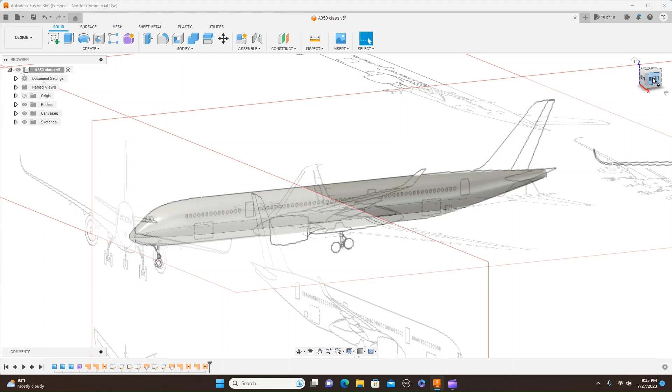So let's see here. What I'm going to do is go ahead and turn the canvases back off, button over here. Now, as you can see, we have fuselage. What I want to do now is take a look at the bodies here, and there's three bodies here. What I'm going to do is combine all these three bodies. So you have this nose, the mid body, and the back here. So what I'm going to do now is go to Modify and select Combine.

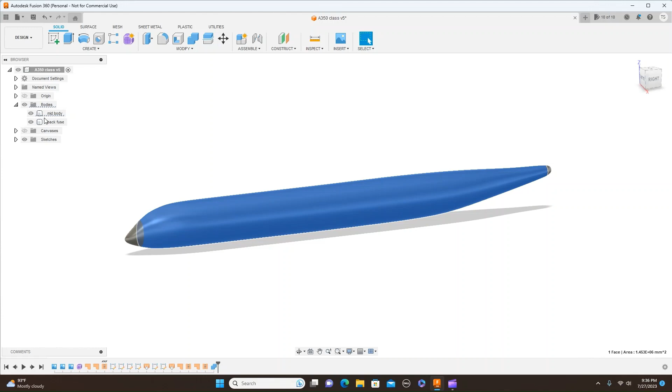And now I'm going to select this as target body, the body here. Then the tool body, this stupid thing. Anyway, select the tool body here and set this to join and click OK. Now you can see over here, we no longer have the nose. Now it's all with the mid body here. So we turn this mid body off. See, the mid body and the nose turns off.

And we're going to do that with the back piece here too. So once again, going to Modify, Combine, click this as target body, and the tool body is this, and hit OK. Now we only have one body here, as you can see, turning on and off.

And some of you are probably wondering why there are no lines in here. To turn the lines off like this, you type in Control-4, it turns them off, and then Control-6 turns them back on. Another little trick there.

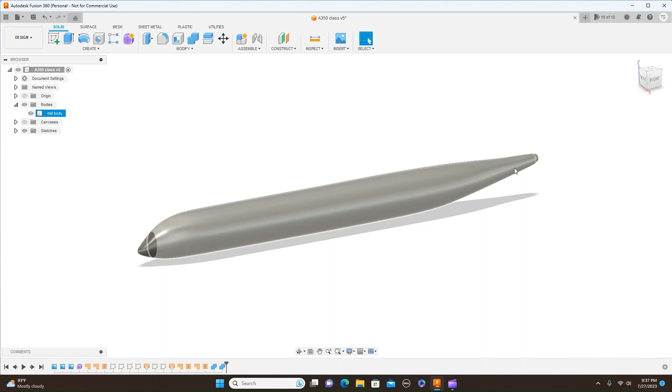But anyway, what I want to do now is make this hollow. So I'm going to come up to Modify, Shell, and I'm going to select the faces I want to shell. I want to shell this, this, and this. So there's three faces, or excuse me, three bodies I want to shell. Now, I want the wall thickness here to be 1 millimeter. So I'll just type in 1 millimeter here and hit OK.

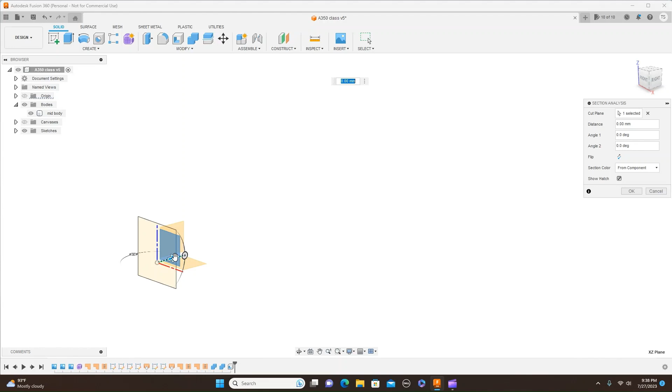Now, you can't really tell that this is shelled inside or not. So what I'm going to do is go to Inspect up here. And now we're going to go to Section Analysis. Now, I want to select this plane here and move this back. As I turn this around, you can see that's hollow inside. Go ahead and cancel that. We don't need it anymore. Now we know that it's hollow inside.

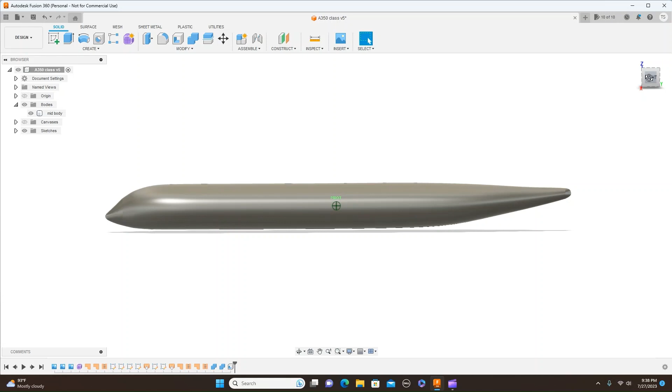Now, unless you have an extremely large printer, you're not going to be able to print this whole thing out. So what you want to do is split this up in pieces. Even if you did have a large printer, with the thin wall, like we have 1 millimeter, this would be very weak here in the middle section. But anyway, I'm going to show you how to strengthen up each section too as we go along.

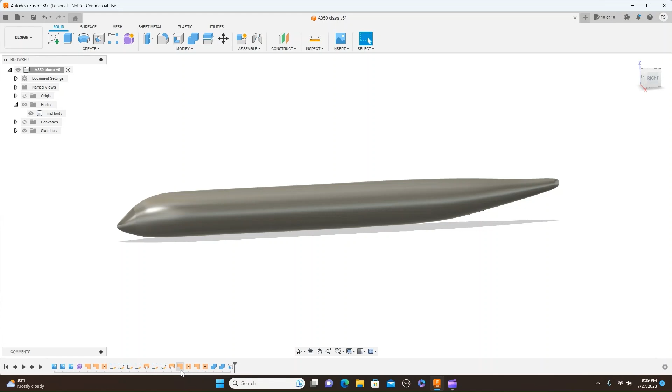So first here, I'm going to do a construction plane, and we want to do an offset plane. Now the plane I want to offset is this front plane here. Now move it back to, if your printer can only print on the z-axis 200 millimeters or 300 millimeters, go ahead and use that.

Or set this to that distance of 250 or 200 or 300, whatever your printer's height will print. But I'll just go ahead and set this for 250 here. And then I'll hit OK. Now I have a plane right there. It's a construction plane right here.

So now what I want to do is split this nose from the rest of this body here. So I'm going to go up here and select Split Body. And this is the body I want to split. See right here, it says body, to select this body. And now the splitting tool that I want to use is this plane here that I just created. And hit OK.

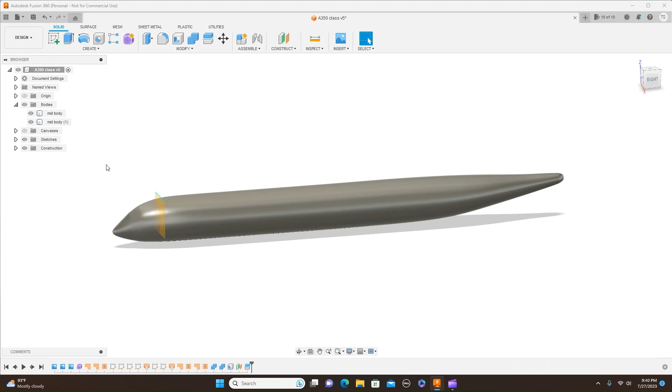Oops. All right. As you see, it split that. And we have two bodies here. So I want to turn this construction plane back off too, because we don't need it right now. But now we have this separated from this. Now this here, I'm going to go ahead and change the name of it to nose, or fuse one, or just nose. Nose would be better.

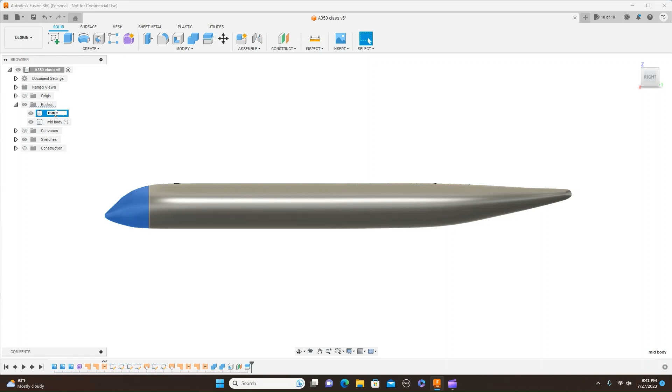All right. Now we have this here. I'm going to turn this off in the back here. And look at this. Now, since this is 1 millimeter all the way around here, this is not very strong here, the structure. So what I've seen other people do, they'll put a ring around here to give this structure strength. And so that's what I'll show you how to do, is put a ring around there to give it strength.

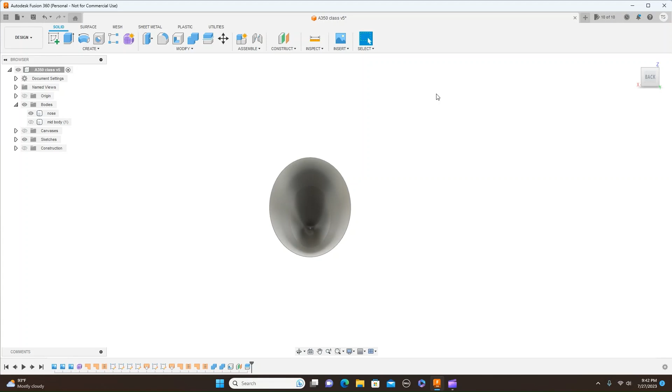Okay. Want to turn this construction plane back on, and we want to create a sketch on this construction plane. Also, now what we want to do is select P to project this ring here, or the picture of that back ring, onto this construction plane right here. And make sure you have this set to specified entities and click OK.

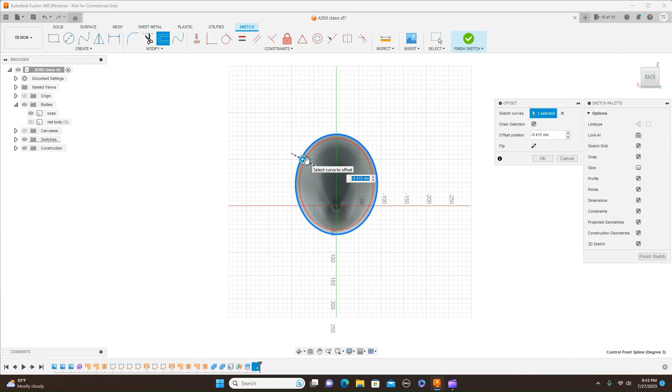Now what we can do is do an offset here. Now you can click this offset here, click here, and we want this to go in to, let's say, -10 millimeters. Enter. Okay. Go ahead and finish sketch.

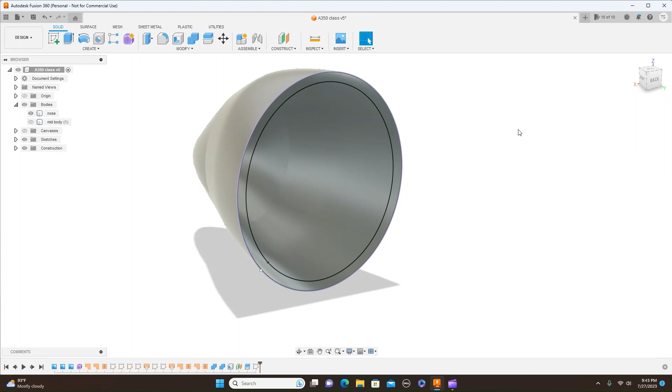All right. Now what we want to do is extrude this ring right here. So we'll hit the letter E for extrude, and we want to select this. Now over here, new body, we don't want a new body. What we want to do is just join the two. So depending how thick you want this to be, I'm going to put it at 3 millimeters. So -3 millimeters. And click OK. Now we have this ring back here. Now having that ring like that will give this structure a lot of strength.

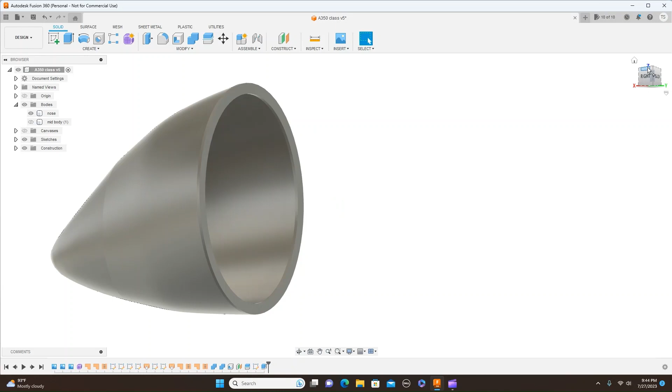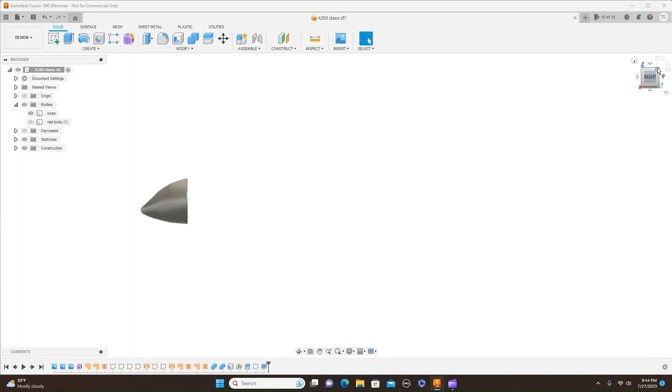Okay, now we can turn the other body back on and have a look. And that's what we have so far. So we have this nose and this rest of the fuselage. Now, here's another little bonus clip that I'll do here. Also, I'll turn this back off. And let's say you want to have retractable landing gear in your model, and you want to have a plate in here for that retractable landing gear.

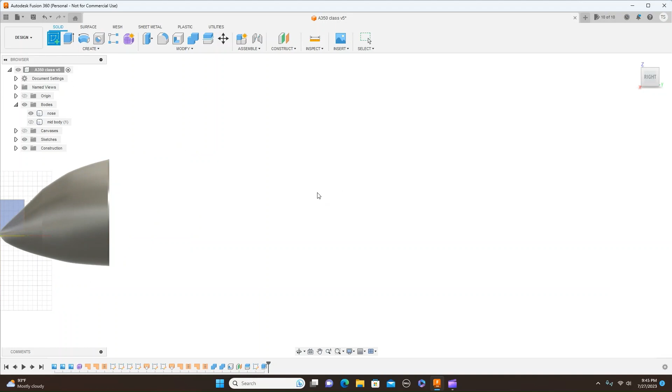What you want to do now is create a sketch. Now, this plane right here may be high enough, but if it were not high enough or low enough for your gear, what you want to do is just come up here and do an offset plane. Then it's going to ask you which plane you want to offset, and you want to offset, say, this plane right here. And let's say it's not high enough, you just move another plane up here to where you want it to be, and then you click OK.

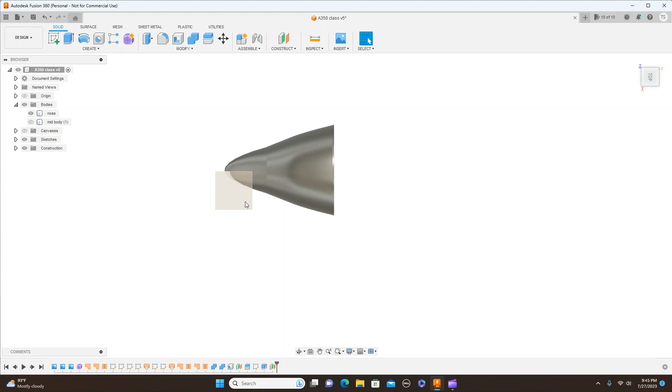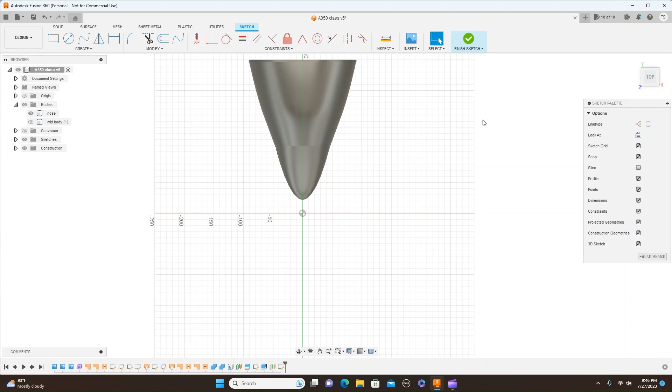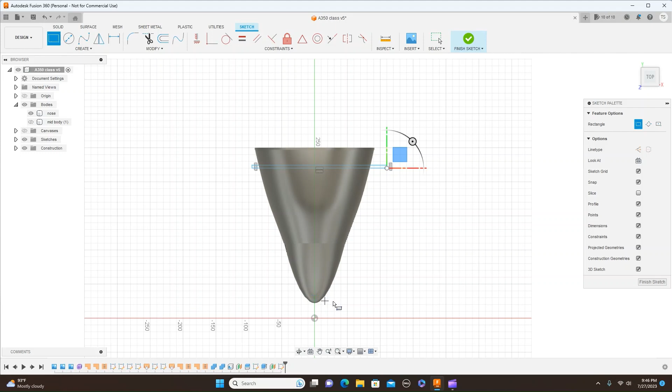Now, what you want to do is go ahead and draw on this plane right here. So what I'm going to do is go ahead and click create sketch again, and it's going to be on this plane here. And now I'm just going to draw a box. Here, here. Now, you can move it all the way up to the nose if you want to, but I'm not going to put it all up to the nose.

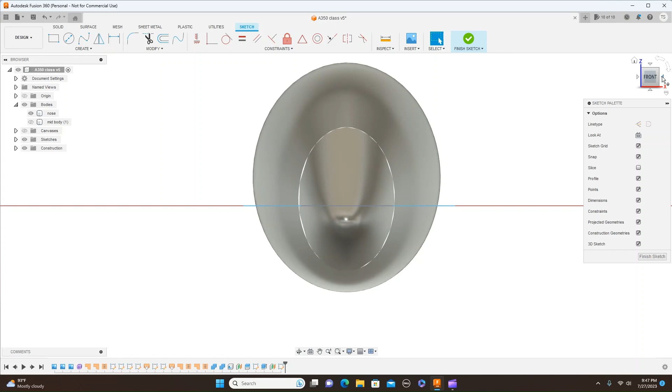Let me escape here for a second. I didn't mean to do that, so we're going to just click back, get rid of that, and click here, here, here, here, and here. Click OK. Now, we have this box drawn on that plane right in here. And you can see that.

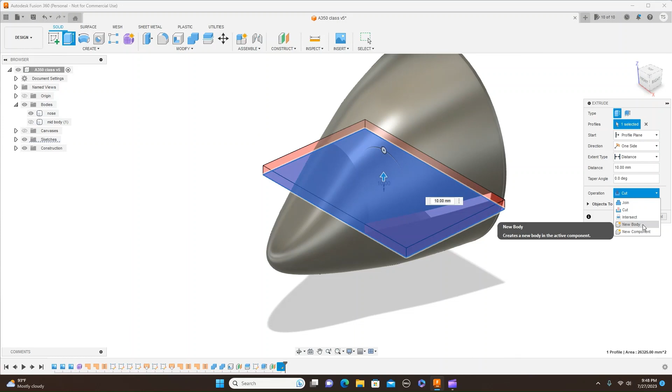Now what we want to do is extrude this box. So we'll hit the letter E for extrude and select this. And depending on what thickness you want this to be, I'll just say 3 millimeters. Move that up, but you don't want this set to cut. You want this set to new body. And click OK. Now you have that inside of there.

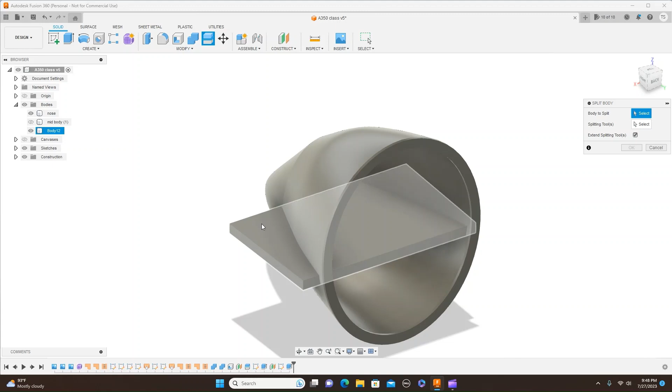So what we want to do now is get rid of the outside of this, so we'll just have this and then the internal. So what we do here, we're going to do a split body. You come to modify here and go to split body. This is the body to split here, what we just did. Then the splitting tool, select splitting tool over here, and it's going to be this. And we hit OK.

Now, what we can do is here, body 13, which is that one here, right click, and just click remove. And this here, body 14, same thing, right click and remove.

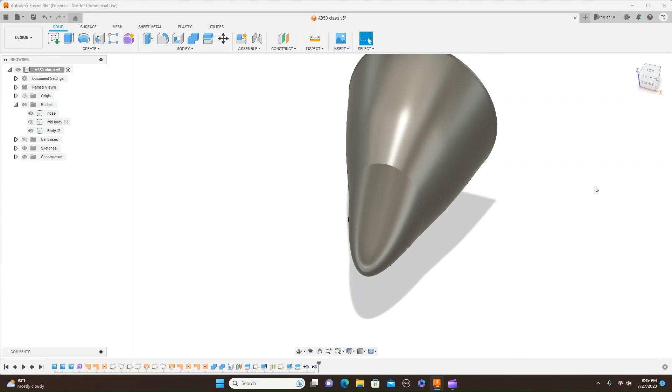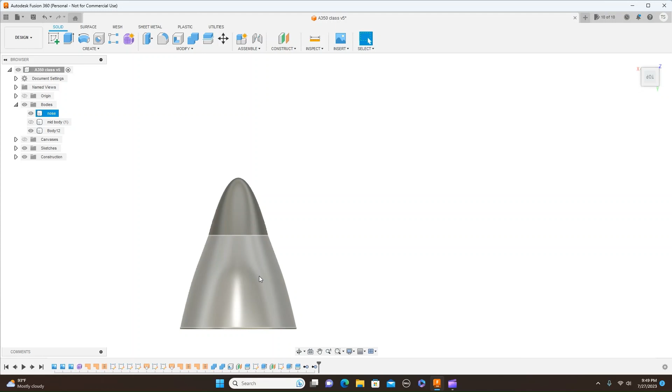And as you can see, this is inside here now. What we can do now is turn the nose off here, and this is still remaining. So measure your landing gear, and if you want to draw an opening so your landing gear will fit right down in here, you just hit create sketch, and you want to draw a sketch on this plane here.

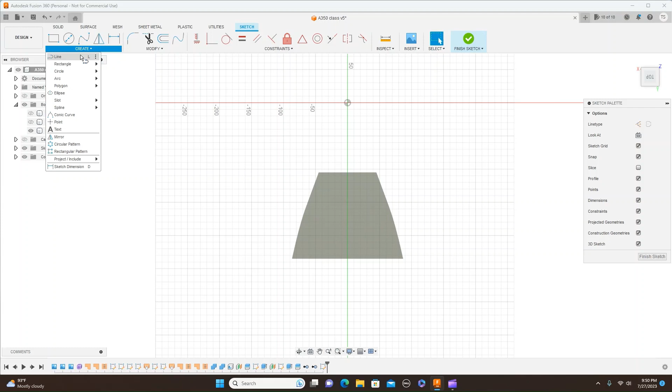And don't select this plane. You want to draw it right on top of here. So back to the top. Click here. And you can use the shortcut key L for line, or you can come over here and click line. And after you measured how big your landing gear is, I'm just guesstimating what size it would be, just to show you how to do this.

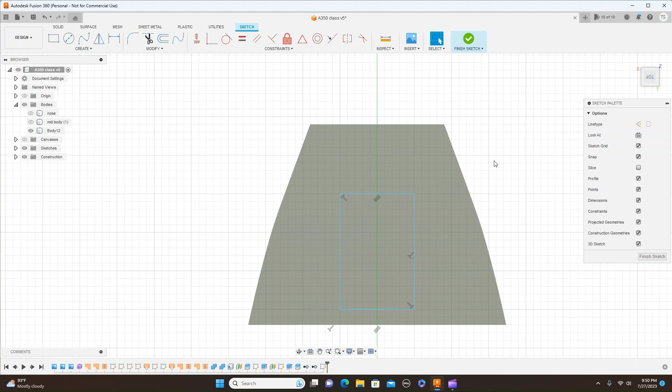Now here we want to extrude this. Hit the letter E for extrude, and we want to set this to actually cut. And take this and move this down and click OK. Now you have this. If you turn the nose back on, then you have that inside of there.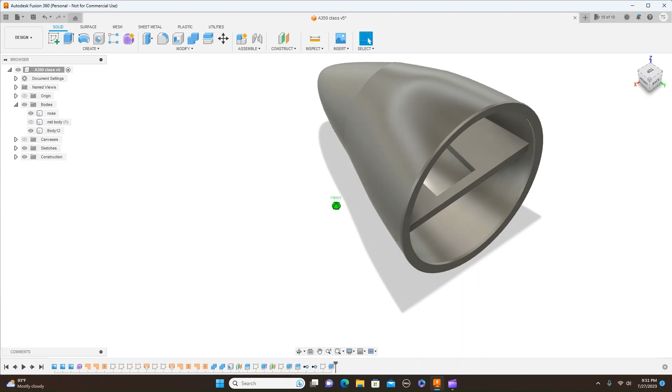Now you may even want to go farther and put the holes here for the mount. And to do that, again, create sketch. You want to draw here. And select center diameter circle. And let's say if you want it here. And let's just say 5 millimeters. Okay.

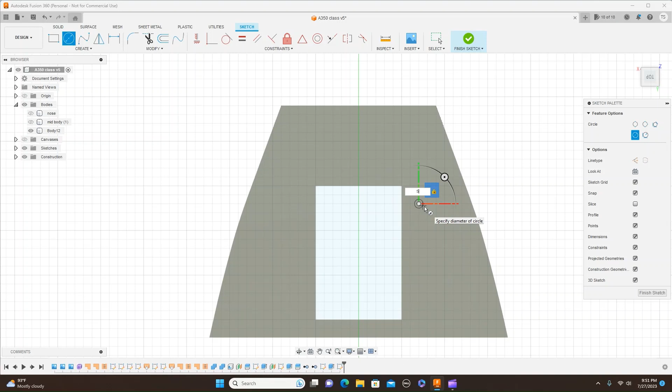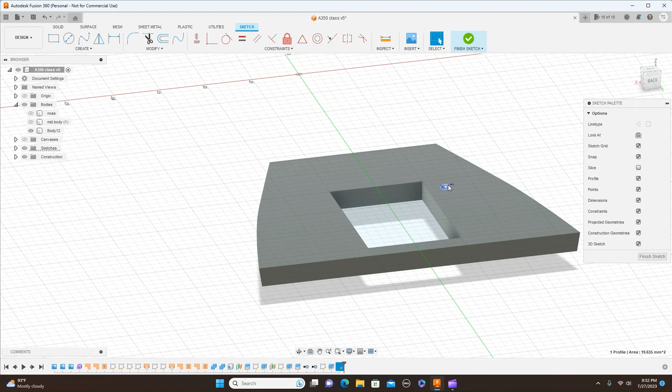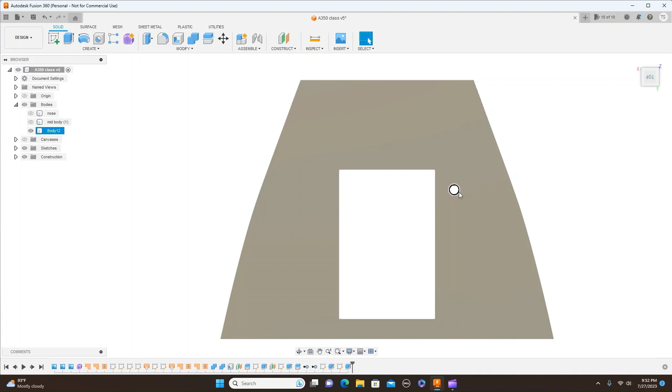Now we want to extrude this here. Now we want to have this as a cut. As you can see, it goes through, and there we have it. Now we have a hole there. Now what we can do is mirror this to over here, but I'm not going to do that. Something you should work on, but you don't have to. It's up to you how you want to do it. But anyway, that's how you do that.

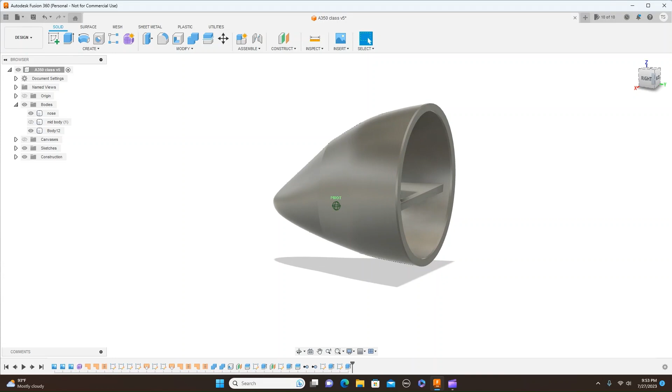And we can turn the nose back on. Now we have that inside. And that's how you do the nose. This is just one way of doing it. It can be done many ways. So now turn this off. And turn this plate off here too.

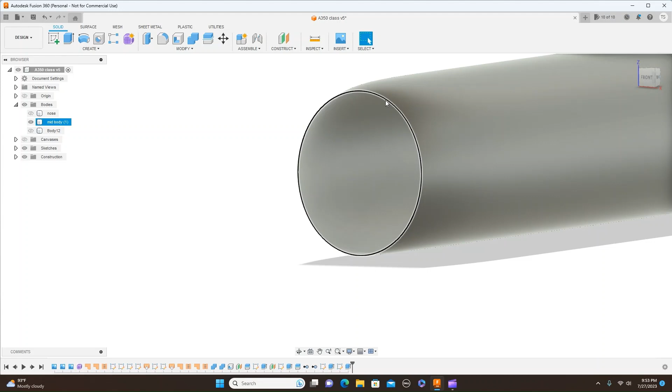Now, this ring right here, we want to strengthen this too, but we could put a ring around here. One second here, what I want to do, I'm just going to split this body even further, so we don't have the back end. So come up here, split body. Well, not split body, cancel that. I need to put a tool to split it with.

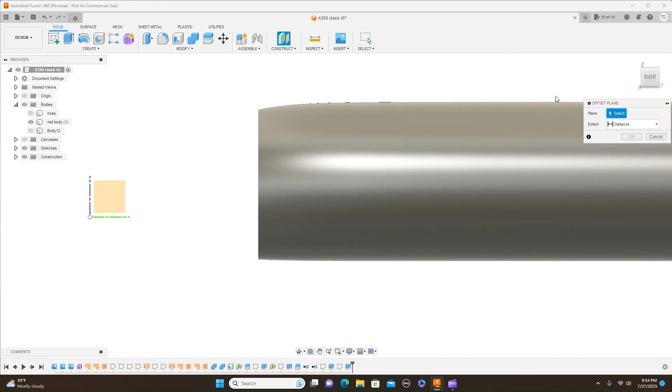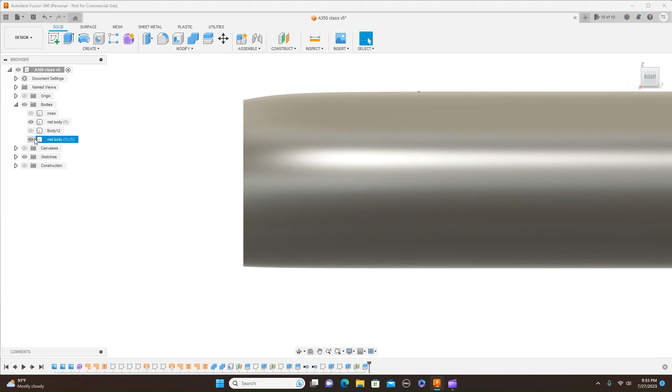I'm going to use an offset plane. And the offset plane, I want to use this and move this 450 and okay. Now I want to split body. Split this body, use this as the tool. Oops. And select OK. All right, now this is split too. Turn this construction off and turn this back half off here. And we just have a section here.

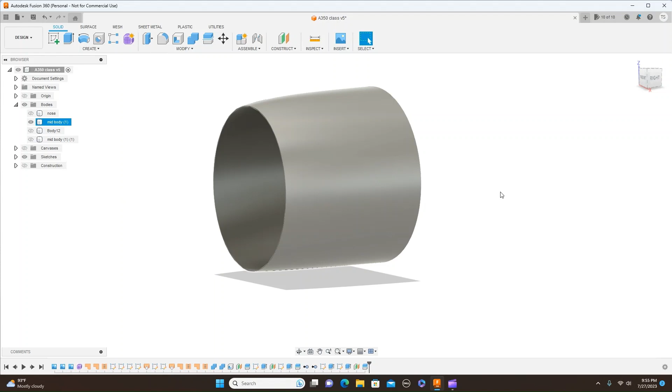Now, this being 1 millimeter thick, the wall here, this is pretty flimsy. The front and back are pretty flimsy. And to correct that with the nose, I showed you how to put that ring on there. But the front section here, you may want it to line up with the front ring better, you know. So what we can do is draw an alignment pin on here to come forward.

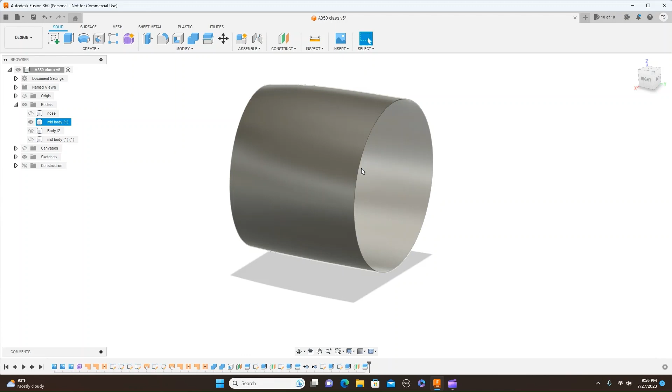But anyway, that's going to be it for now. And so I'm going to show you. But what you want to do, like I said, is draw that ring like I did on the first section back here to give you the strength here. Then what you want to do is, like I said, just put pins up here, alignment pins, so this lines up with the front half. So you know what? I'll just go ahead and show you how to do that.

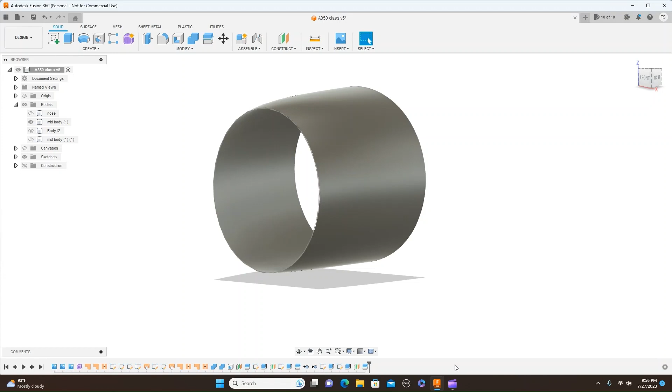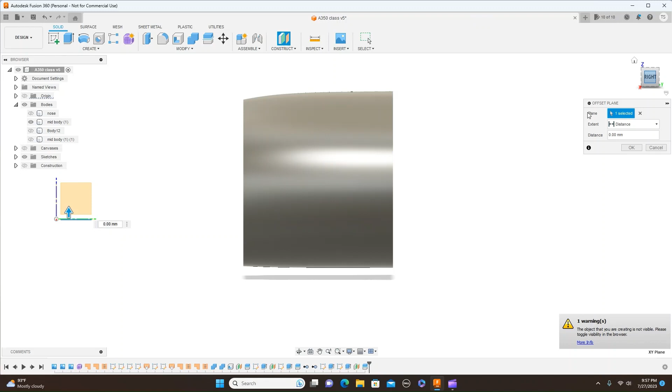All right. So what I'm going to do now is, again, do an offset plane, construction plane. Now I want this to be on this plane here. And as you saw, the little warning there said the plane that I'm drawing will not be visible. So I just come over here and turn the construction planes back on so you see them.

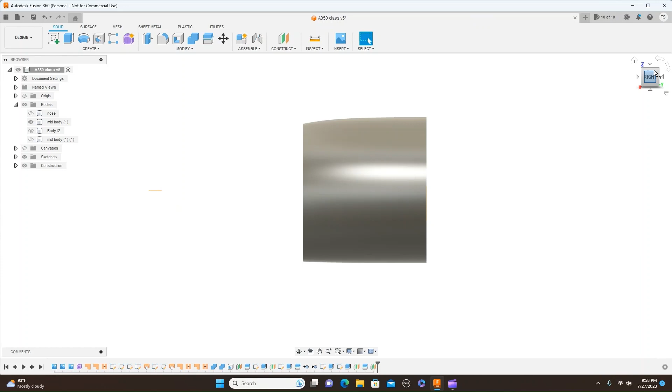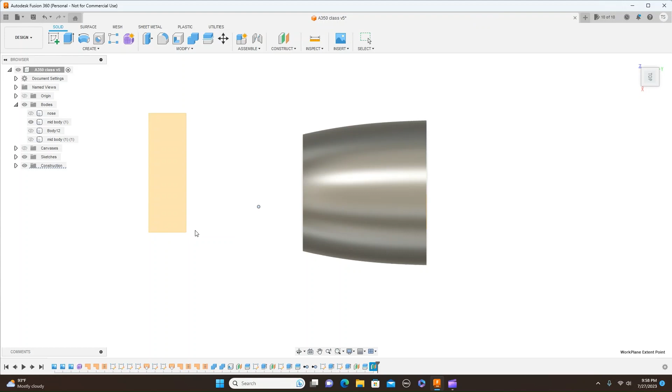So I'm going to bring this up. Rotate this. And now hit OK. There's a construction plane right there. Now if you think this construction plane is way up here, you can draw it bigger if you want to, but it really doesn't matter. As long as you know the plane is there, you're good to go.

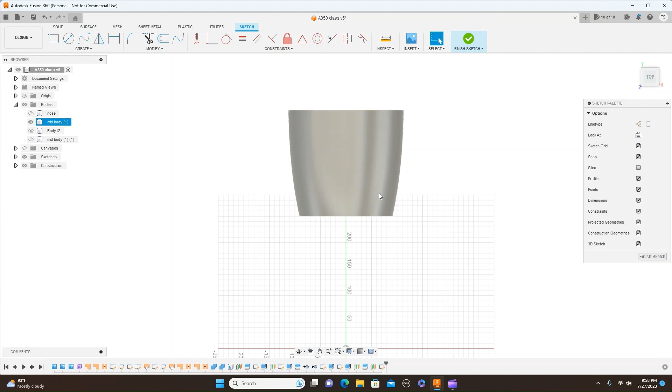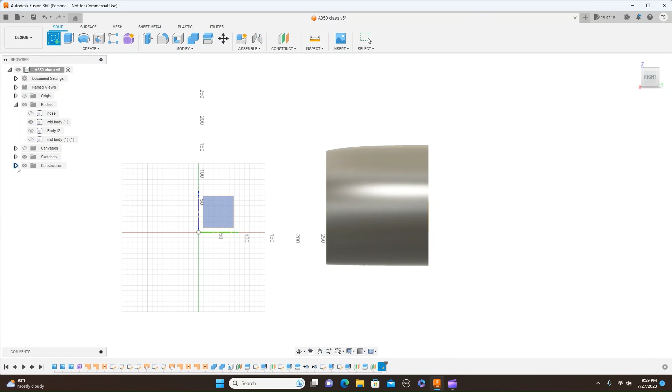So what I'm going to do is create a sketch, and we want it on this plane here. And again, I'm just going to draw a box right here. Shortcut L for line. Oops. Okay, this here, don't need, delete. Okay, let's do this again. And this plane here.

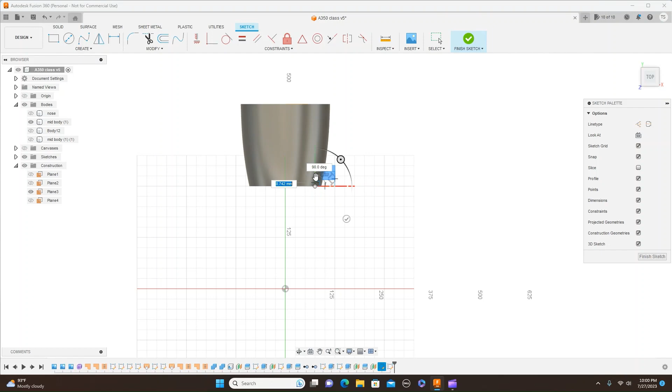Okay, now we have that there. Box right there. Now we want to extrude this also. E for extrude. And let's make this 10 millimeters. Set this for a new body. Click OK. Now we have this here.

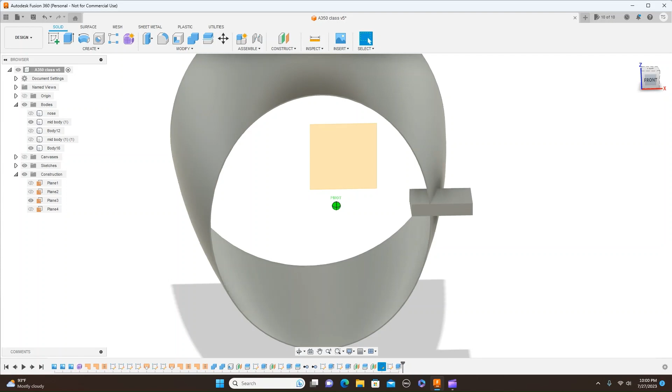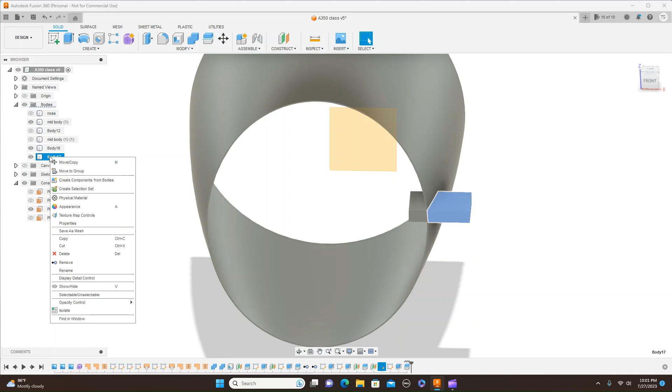Now what we want to do is split this body again. Come up here to split body. Select the tool, just this, and click OK. Now this here, which is body 17, we want to remove it. Again, this is just one way of doing this. There's many ways of doing this.

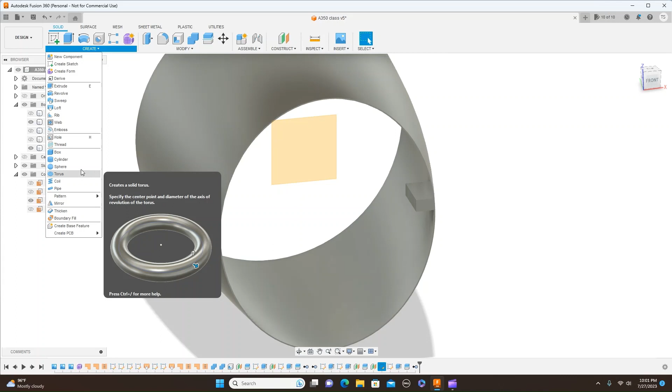So from here, what you want to do is go ahead and mirror this to the other side. Here, and we want to mirror. Now we want this select set to bodies, and we want to mirror this body here. And the mirror plane, what we want is this plane here. And OK. Now we have both of these over here. And we turn this plane off. And leave it on. But anyway, now we have that. And you want to do the same for down here and up here also.

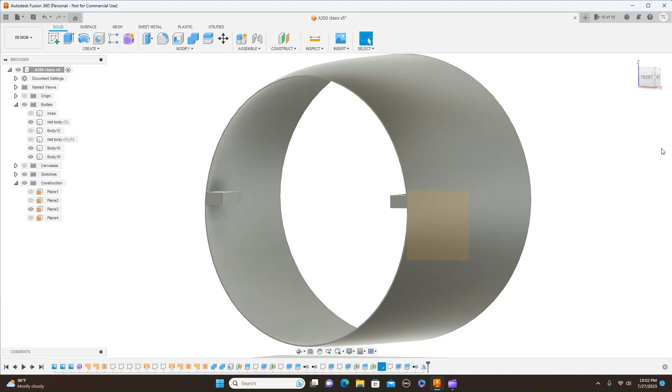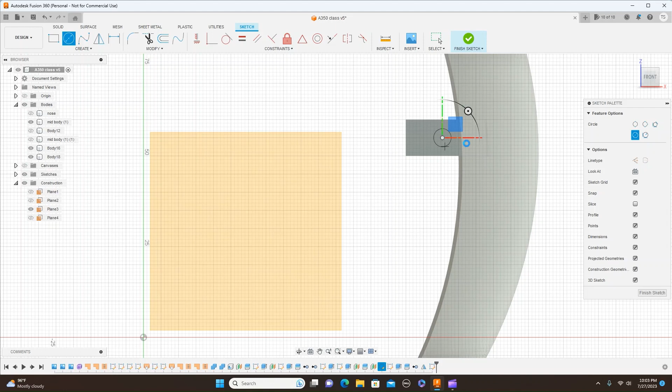Now, I want to draw another sketch on this plane here. So, create sketch on this plane. I'm going to draw a circle. And I'll make this 5 millimeters. Click OK. Now we want to extrude this. And we want to join.

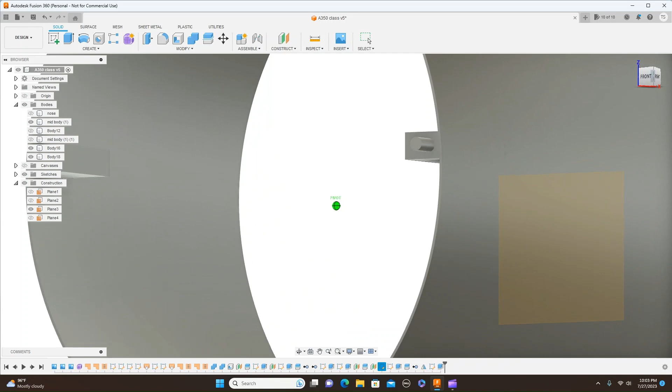Now this distance, you'll have to measure, see how far you want this to go in the front, but don't want it too long because it can come out the front. So what I'm going to do is just move this back. 10 millimeters is fine. Join. Click OK. Now we have that. And I'm going to go ahead and mirror this to the other side.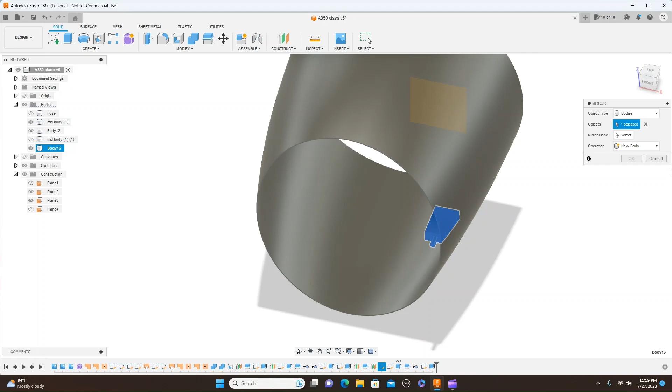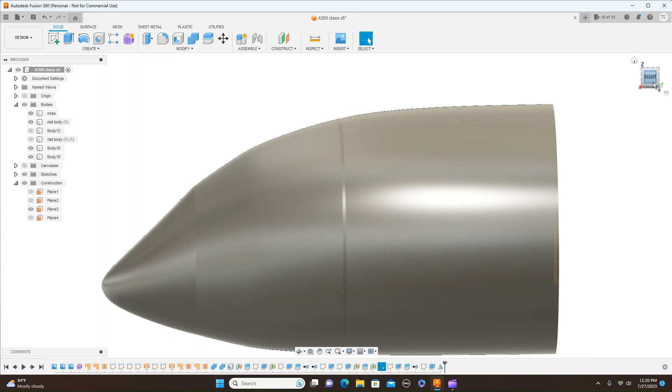Okay, what I'm going to do here is this body right here, I'm going to delete it. Now I'm going to mirror this body over here. I'm up here, mirror this body, plane, this plane here. There we have it, new body. And there we are. Now turn the nose back on, and this is what we have here.

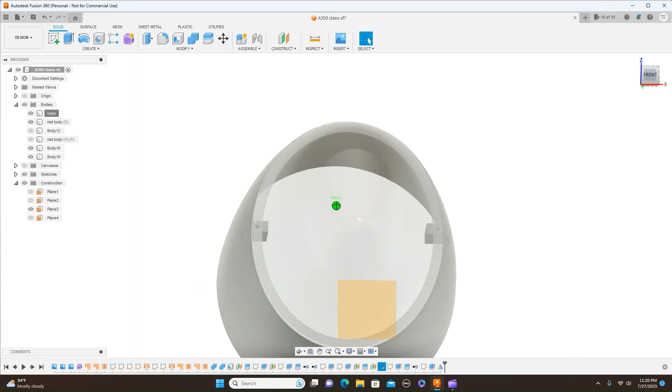Now we can't see it inside here, but what I'm going to do here for this nose, come up here, right click, go to opacity, and move this down to 50%. Now we can see inside of here. Now what I want to do here is I'm going to turn off this body here and keep these two here.

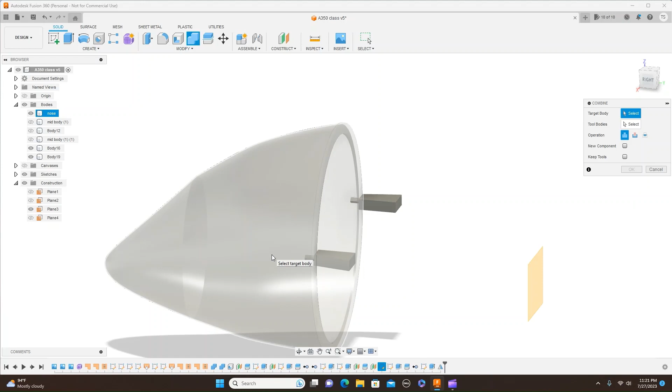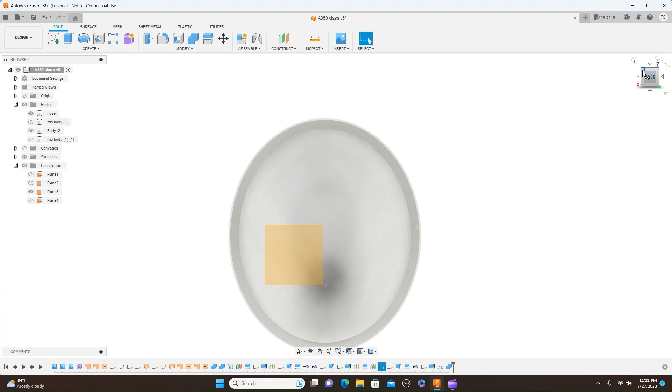And now I want to put a hole in this ring for this to line up with. And how I'm going to do that is modify, combine. Now the target body is this. The tool body is this. We want to set this operation to cut and click OK. Now we have the holes in there too to line up. So we can turn the mid body back on. And that's what we have so far.

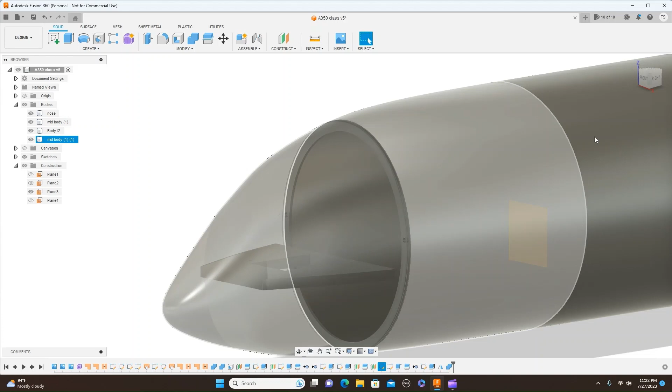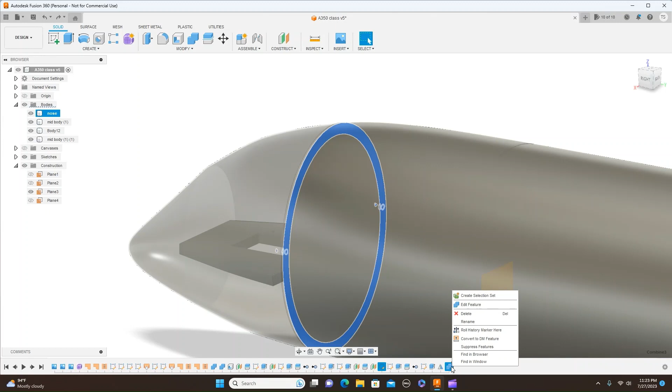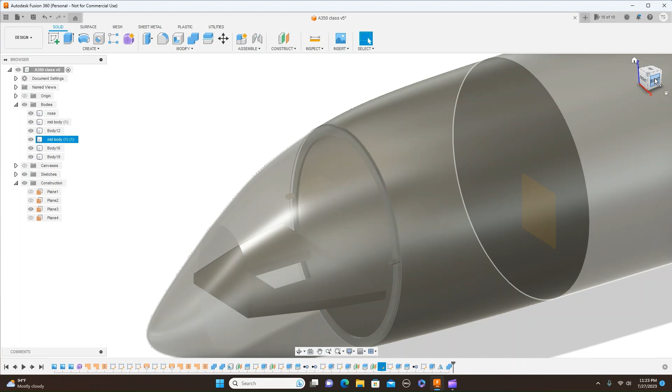Okay. What I'm going to do here, I want to edit this. Keep tools. Now everything is back. And as you can see in here, we have the alignment pins through here. Now when you 3D print this, and there will be two more pins up here, when you glue this all together, this will all align up, and it'll be very, very strong.

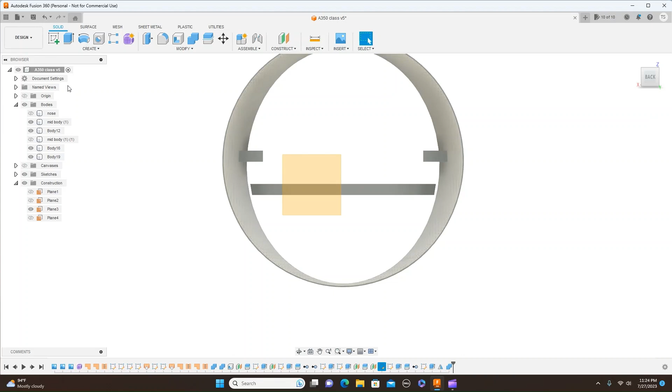So one more thing I'll do here, I showed you how to do this already, but I'll just go ahead and do it one more time. Turn this off. Turn the nose off. And what I'm going to do here is just draw the ring back here like I did before. Okay, so what we want to do here is create a sketch on this plane. Then we want to project this. Make sure this is set here to specified entities. Click OK.

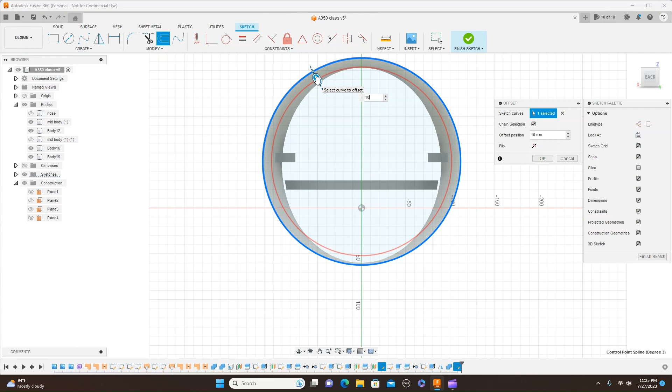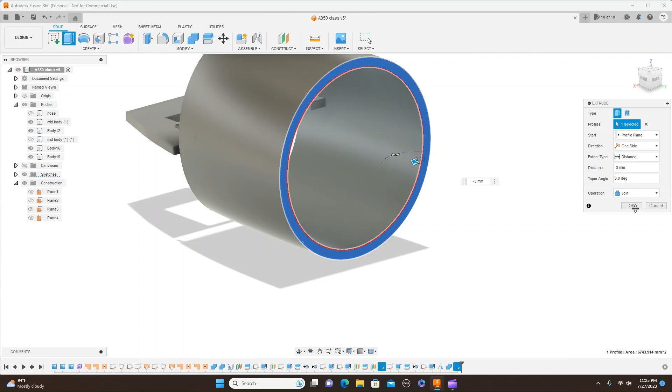Now we want to do an offset from here. Offset here. Click here. And we want this to come in 10 millimeters. And click OK. Go ahead and finish sketch. And we want to extrude this. So hit E for extrude. And we want that to go in 3 millimeters, or -3. We don't want it to cut. We want to join and click OK. Now we have that ring back there too.

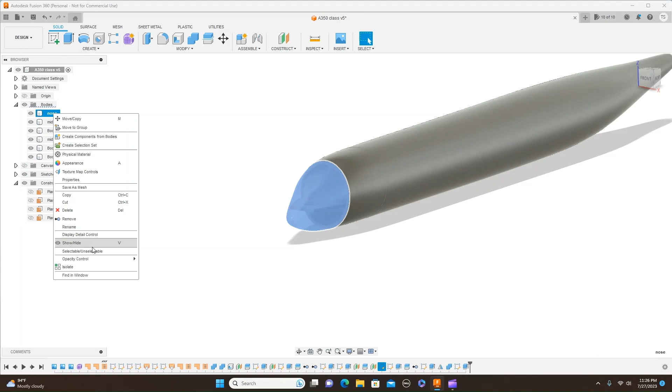So this is what you're going to do to the other sections all the way back. You're going to make sure you have alignment pins up here, and you want this ring in the back all the way through. So right now that is what we have. And now I'm going to just bring this nose opacity back up to 100%. And there's what we have. Now, just looking at this, you'll never know there's alignment pins in here and a deck here to put your retracts in there also. Just from the outside, you can't tell that. But that's it for now.

And in my next video, I'm either going to show you how to draw the wing on here or draw the stab. Decide which one. And as a bonus, I'm also going to show you how to make molds from this also in the next video. So that's it for now.